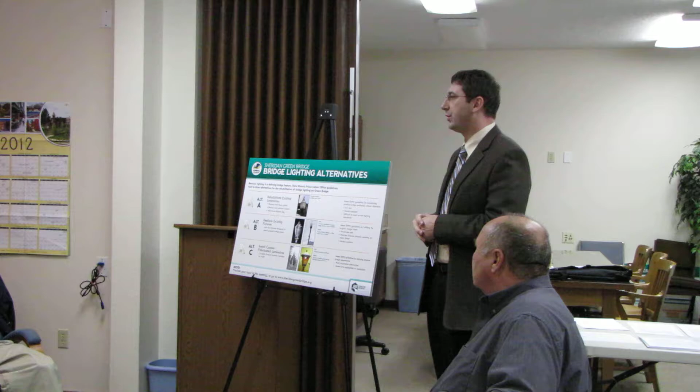However, so we're a little late in providing this update, later than expected to provide this update to the council. But in terms of design progress, we're exactly where we had planned to be back in October at this time. So there are a couple of items that we talked about back in October. I'll provide you an update about those items. We'll talk about schedule and the scope of the project, and answer any questions that the council or citizens might have.

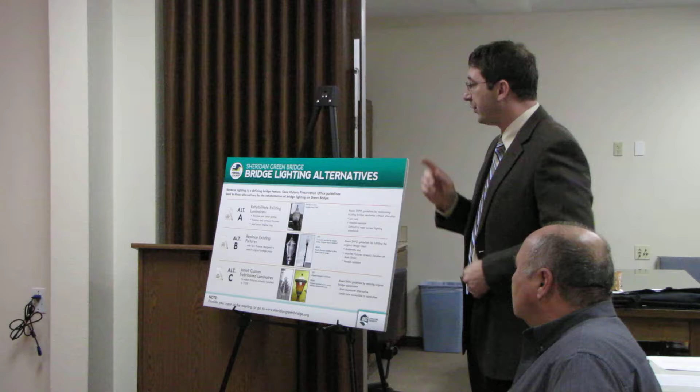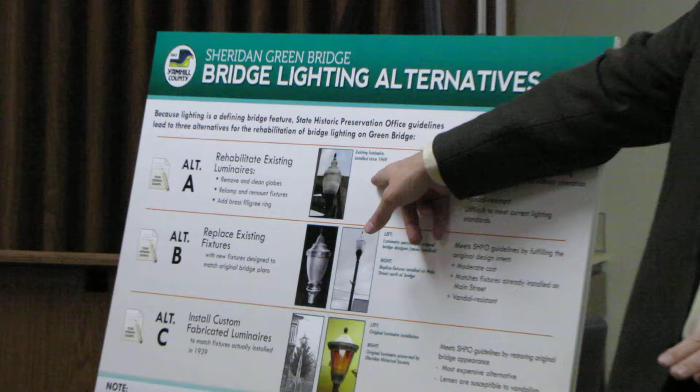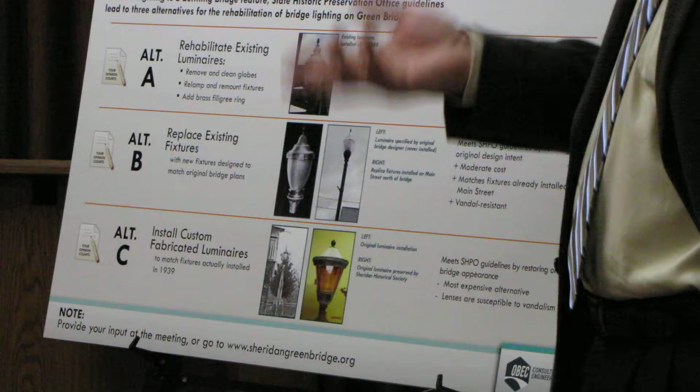All right. So if you'll remember, we had a couple of items that we wanted to open up to public comment, and one of those items had to do with the fixtures, the light fixtures that are on the bridge. And we had posed 3 alternatives. The first alternative being keeping the fixtures that are on the bridge. The second alternative was to replace these fixtures with a modern replica of the original designer's intent, which happens to be an almost exact copy of what the city already installed on Main Street. And so the question was, hey, should we replace the fixtures that are on the bridge with what's already on Main Street? And the final one was to reinstall new fixtures, a replica fixture that was made to replicate the appearance of the fixtures that were originally installed on the bridge, which didn't match the original plans.

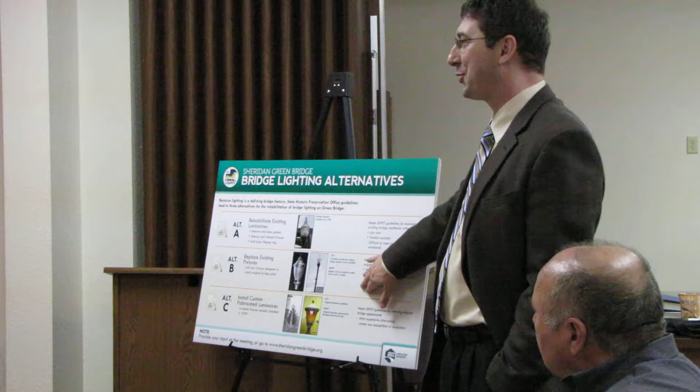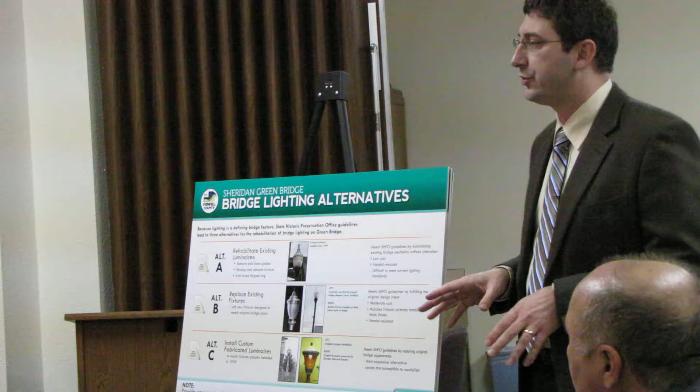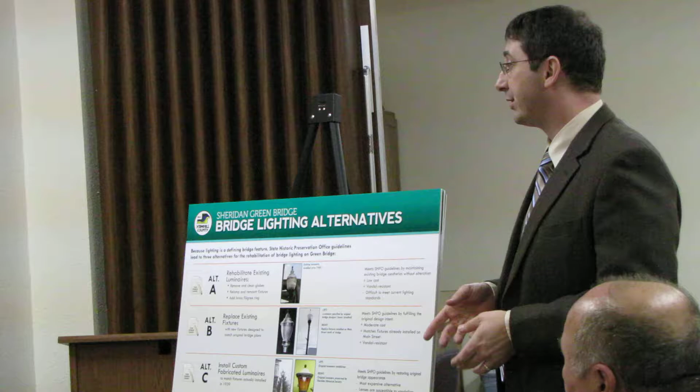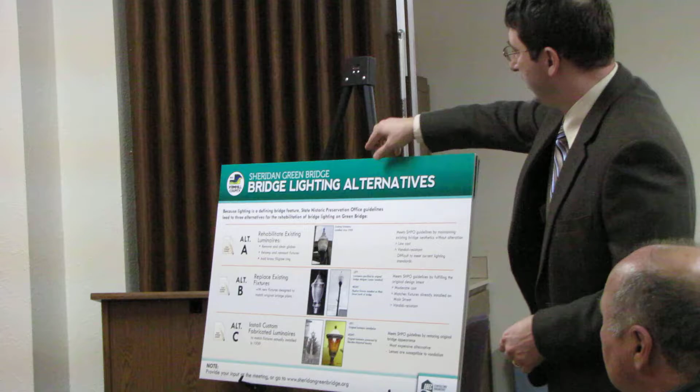Will they have the black posts, or are you going to keep the concrete ones? We're going to keep the concrete posts. That's a defining feature of this bridge. And as part of the scope, the concrete on the rails will get patched. We'll remove any chipped or loose concrete. We'll patch that up. Everything will get what's called a sack finish, so water blast the concrete. Sack finish is you take some cement paste and you rub it on the surface to give it a nice clean appearance. It'll look, when the bridge is done, these rails will look almost new. They'll look very similar to their original appearance. And the concrete rail and the steel inserts will also be painted, so you'll have a nice consistent appearance when that's all done. And obviously that ties into the light fixture and light poles.

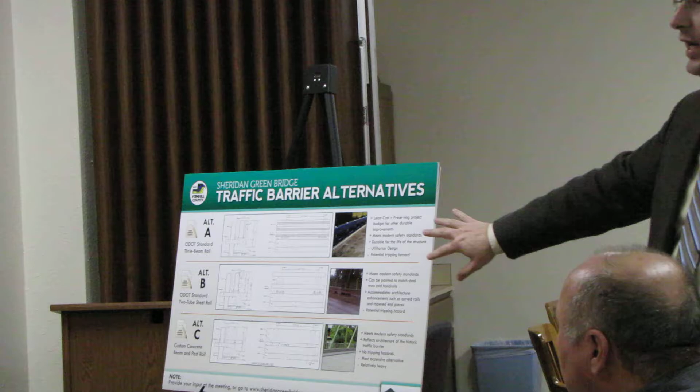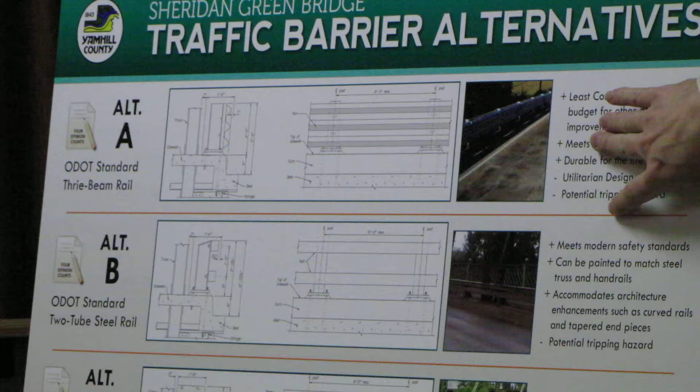The second item that we opened up to public comment was the rail, and I want to spend a minute talking about this in case there's any questions. So we had proposed three possible alternatives. The first one being a very utilitarian, low-cost installation, easy to maintain. That did not receive much support, and we didn't really expect that it would. The second one uses what's called an ODOT standard 2-tube rail.

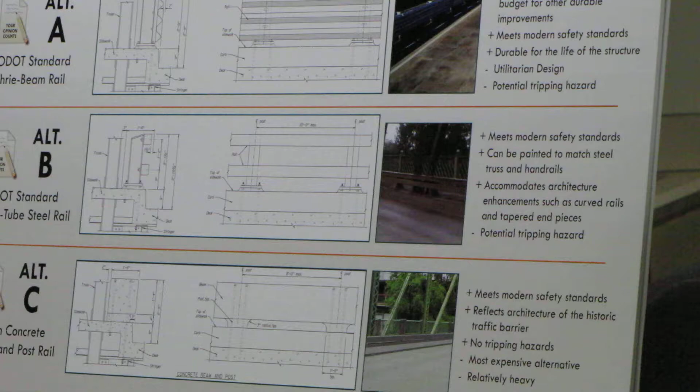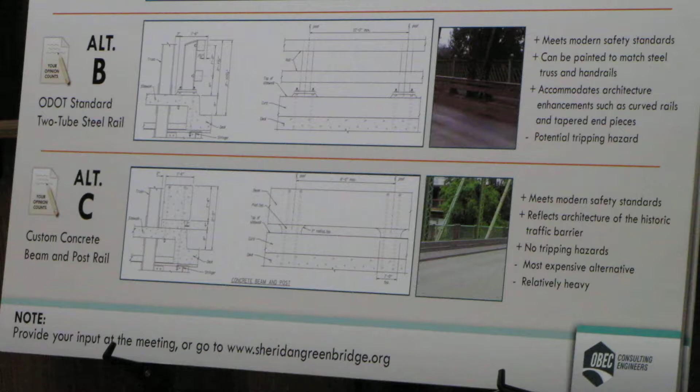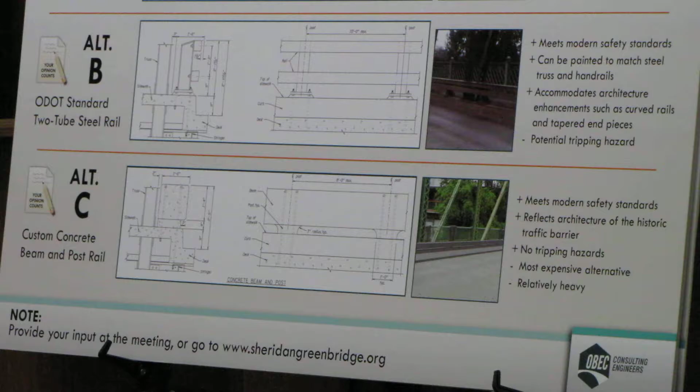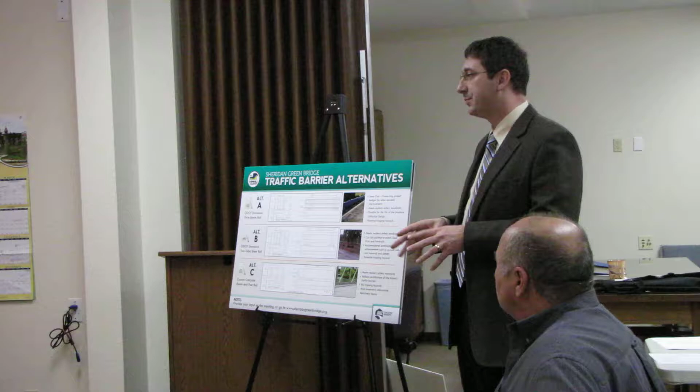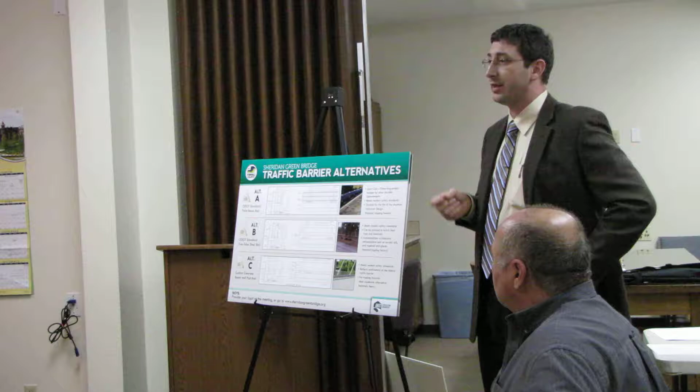In going through the structural analysis with ODOT, we had a couple of technical challenges coming to terms with the design standard this bridge would need to maintain. This rail is a little heavier than the steel rail. It's on the truss span, and it actually produces a pretty significant load effect. So we found that it wasn't possible using a standard concrete rail to get the structural capacity of the bridge high enough to meet the modern standard we need to achieve for safety.

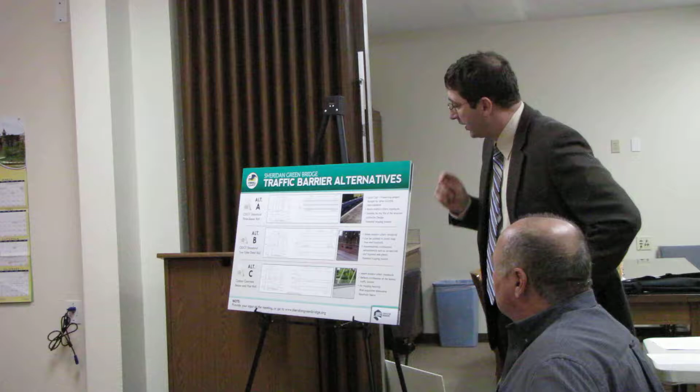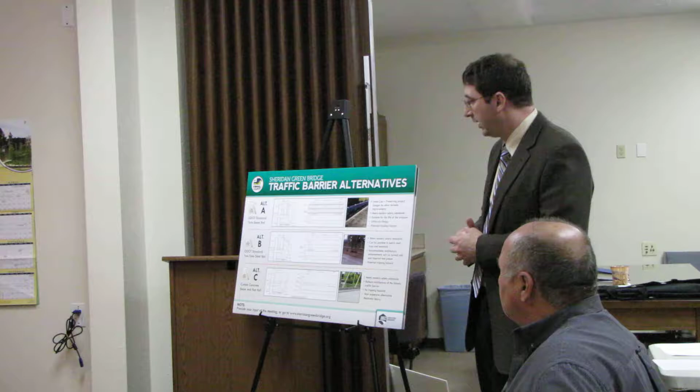So we started looking at the steel rail in more detail. In our open house, we received pretty even votes between the concrete rail and the two-tube steel rail. The reason was people acknowledged there was potentially some benefit with this rail - it's easier to maintain, it's just galvanized steel that fades over time to a gray very similar to the concrete color, and it's lighter. If it's lighter, it preserves more load carrying capacity for vehicles.

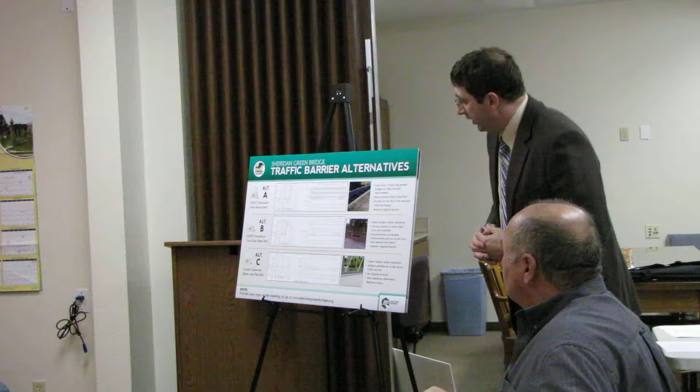So we started looking at what we could do here, because structurally we couldn't get this one to work. And I can go into more detail about the approval process we'd have to go through for the concrete rail to get approval to make it work.

Yes, sir. Question - why wouldn't you do the opposite, just limit them, put a weight limit on the bridge and keep it the way it was originally designed and looked? If you want it to look that way, leave it alone and with that design, limit the weight. The heavy weight that goes over that bridge has no business even being on it, not to mention it limits the lifespan of the bridge, which you just said. Why wouldn't we want to lengthen the lifespan of the bridge on top of keeping it original?

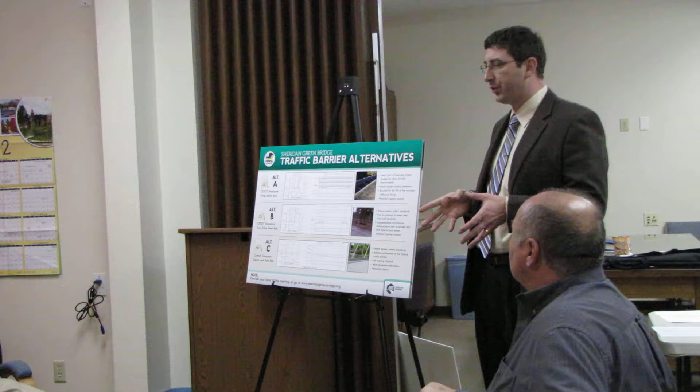Well, I'll explain our thinking. With this rail, we can just achieve a factor of safety of 1.0. That means for vehicles and truck traffic on the highway, the design code we use is calibrated to capture the load effects of typical trucks that are on the highway. With this rail, we can achieve a 1.0, which means we have an adequate factor of safety for the vehicles traveling the highway. Anything less than 1.0, and you don't have an adequate factor of safety according to the design code.

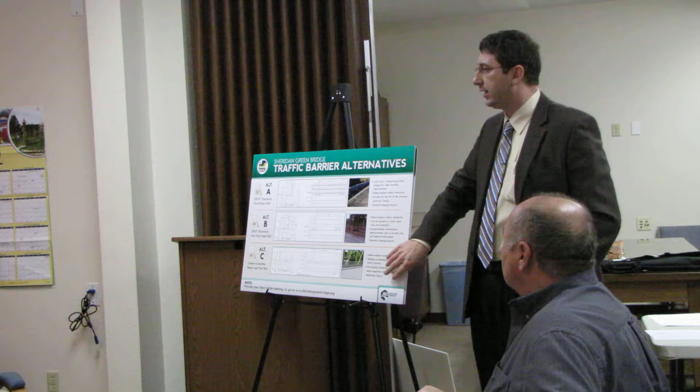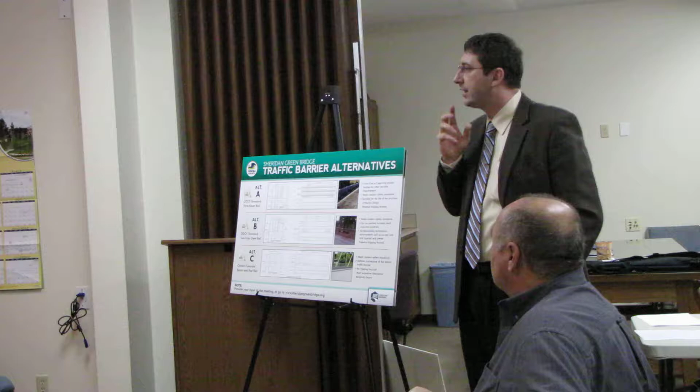This one, we don't reach a 1.0 - it's a bit lower. So from an engineering perspective, the concern is we're putting citizens at risk because we're not maintaining enough live load carrying capacity to achieve that 1.0 capacity. And there's nothing out there controlling those trucks. Even if you put signs up, there's nobody controlling those trucks. So from an engineering perspective, we really like to see that 1.0 because it really is safeguarding the traveling public.

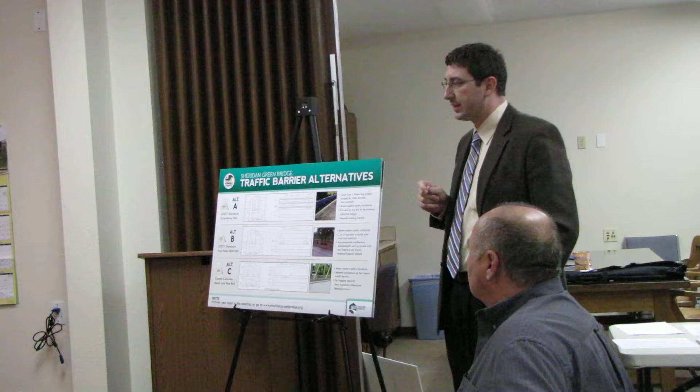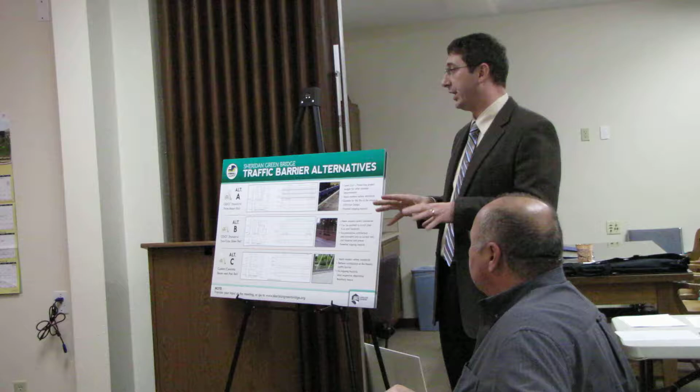It also affects the load that the truss sees - the stresses in that truss are the cumulative load of the dead load weight of that bridge plus the live load traffic going over it. So if we put additional dead load on it and we still see live load traffic that's unchanged, we are upping the stresses in the bridge.

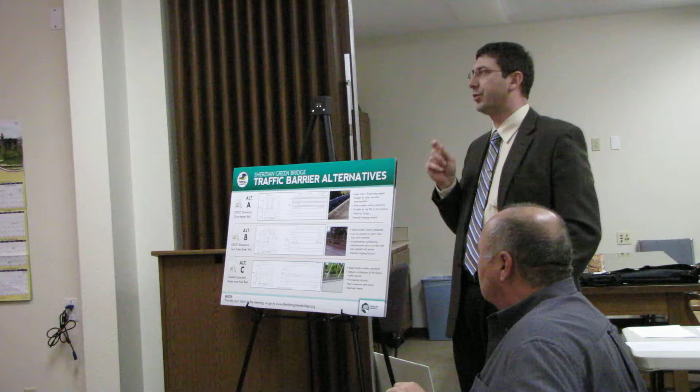And eventually that could lead to cracks developing in the truss and shortening the performance life. So when you looked at the original ODOT reports done in the mid-90s, it suggested that this rail would just work. When we reran the calcs according to the modern design code, it doesn't work. There's been improvements to more accurately capture the load effects inside the truss, and that's what we're using today, and that led us to this design.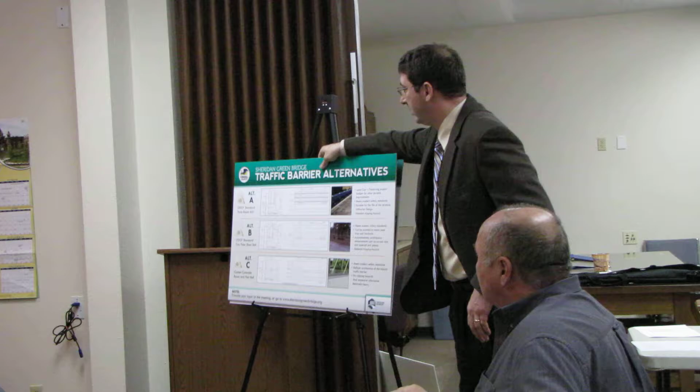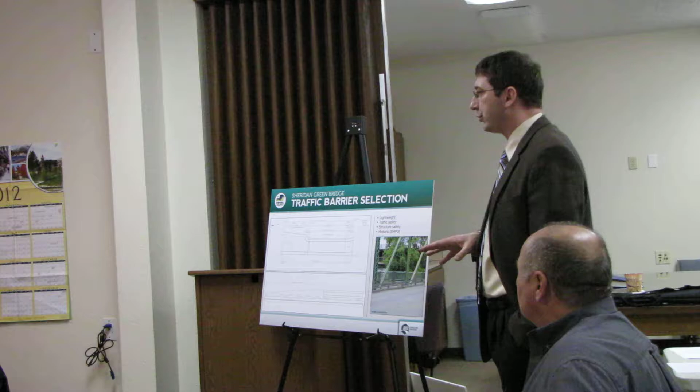So we started working on this concept to see what we could do with it, and we developed a concept. We've discussed it with the county. We've presented it to the State Historic Preservation Office. We have a strategy for maybe making this steel rail a little more attractive, and that's what I wanted to present to you tonight. We've already discussed this with the State Historic Preservation Office. They support it. They're willing to let the project proceed if there's general consensus that this is a pretty good treatment to have. And here's the strategy.

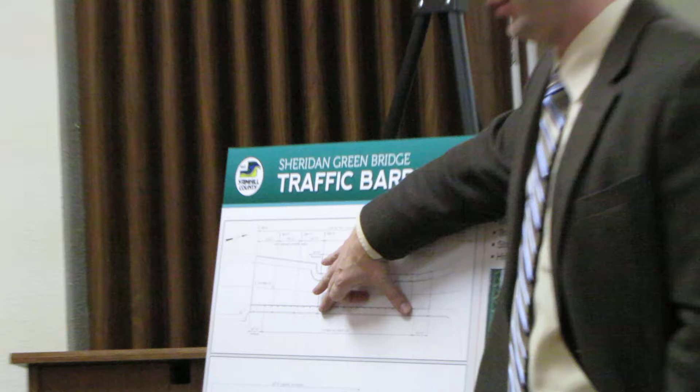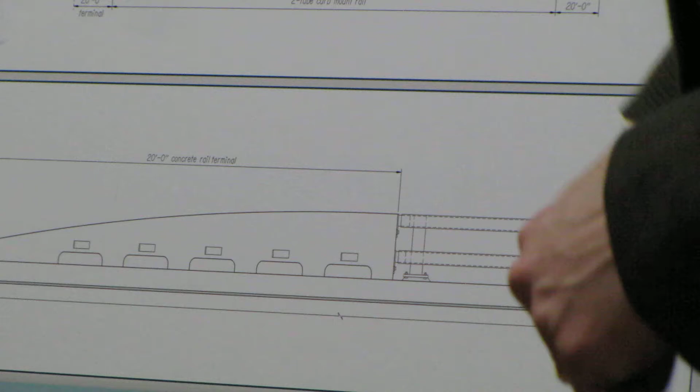The truss span is really the part where we need to keep the load down. So what we'd like to do is use the two-tube steel rail on the truss span and then add a concrete end piece that recreates the visual appearance of the existing felloe guard. The only difference between this end piece that ties into the steel rail versus the felloe guard that's there right now is it's a little taller. But it has the same scuppers, the same reflector pockets. This has been done on the Newport Bridge, the Yaquina Bay Bridge, and a couple of other bridges as well.

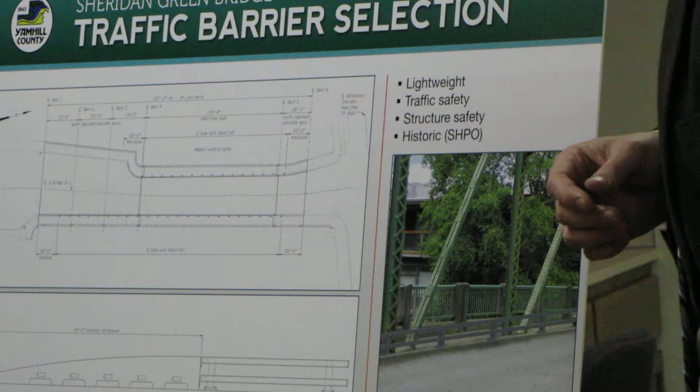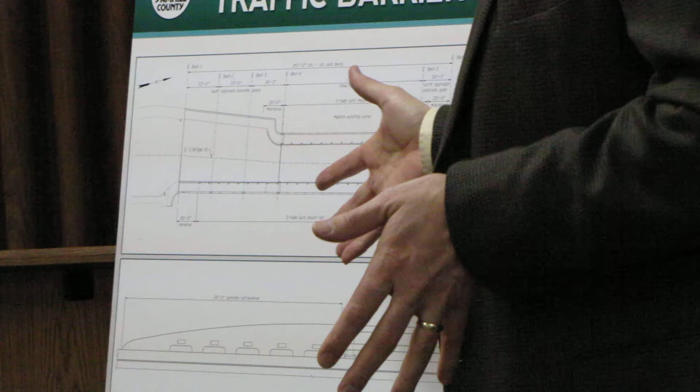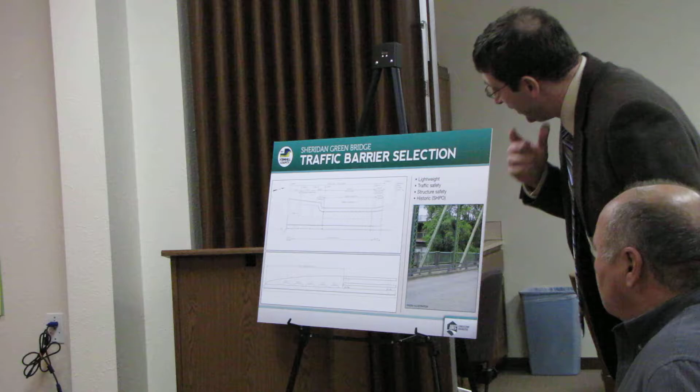To really maintain the feel of the bridge, we want to match the ends of the felloe guard. So where that existing traffic rail ends right now, in all four corners, we want to match those. In this corner where that felloe guard has a nice sweeping radius and then curves down to the deck, we want to recreate that, but we need to change the geometry of that top line just a little bit, so we don't have any hazards and vehicles can't hang up on any snag points. So this is the concept we'd like to move forward with.

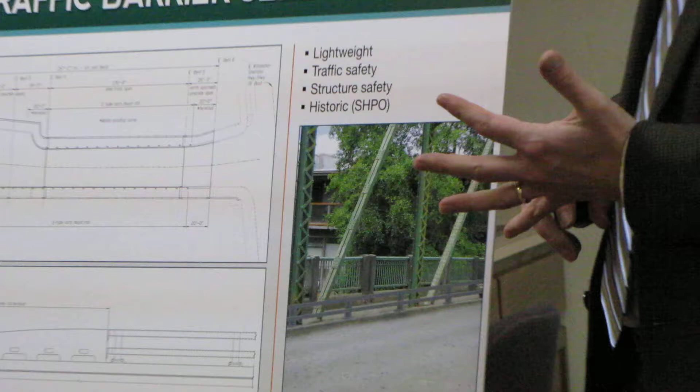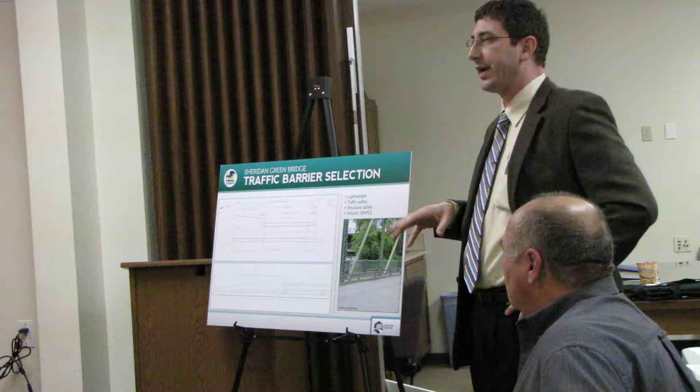So, feedback on this question. Yes, sir, Frank? Go ahead.

I understand the engineering and all that. What bothers me is the slope coming down. To me, that's an invitation for skateboards. Unless we put razor blades. Well, what we do is provide skateboard lugs. They're stainless steel lugs cast into the concrete, so they can't just be popped off. And you space those about every 4 feet, so a skateboarder can't ride down that surface. Okay. Yeah, that's part of the design.

Will we be able to sit on that during the Sheridan Days parade? Yes, this is only about 8 inches taller than the rail that's there right now. People asked that, yeah, that was a public question. So it's only about 8 inches taller, but it is crash-tested, so it will deflect vehicles and prevent them from hitting the truss.